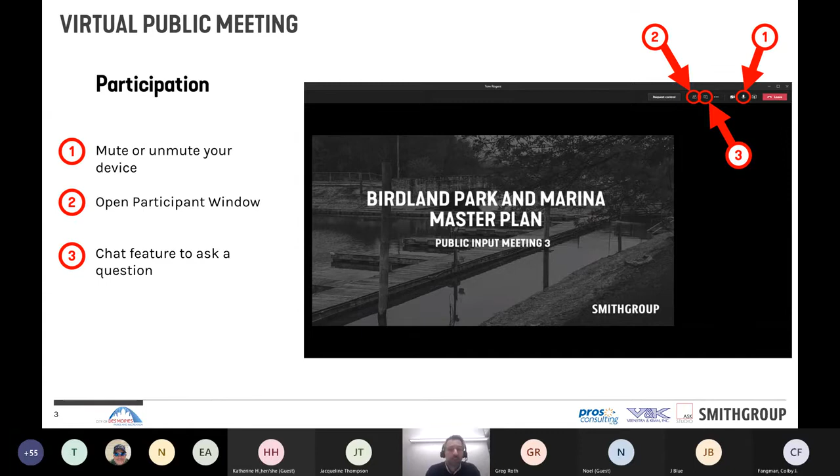As we said, we'll go over the schedule of where we're at, a summary of the work we've done, the concept refinement we've gone through, and then we'll talk about the big ideas we have. There's a few of us on the call this evening.

First, there are three of us presenting: myself, a principal and landscape architect with Smith Group; Jay Blue, a landscape architect and our project manager with Smith Group; and Brent Schipper, an architect with Ask Studio. We're also joined by a few collaborators: Connor Nett, a landscape architect with Smith Group; Greg Roth, a civil engineer with Veenstra and Kimm; and Leon Younger, a consultant with Pros Consulting, who are doing the economics analysis for the project. They'll be on the line to answer additional questions during the Q&A session.

As I mentioned—yes, Tom? Just so you're aware, I'm going to have to allow people to unmute their microphones, so I'll keep everyone muted until that time.

Thank you. As I mentioned, we started this a little while ago, beginning in August with a kickoff meeting. We went through site data collection, visiting the site, gathering background information, holding a public meeting, meeting people, and walking the site. We also ran a few online surveys before starting to develop concepts.

Once we had a basis for what people wanted, we developed an initial concept, or initial three concepts. We refined that and gathered feedback along the way, both from residents and from what we heard in our surveys, from city and park staff, and from our advisory committee as well.

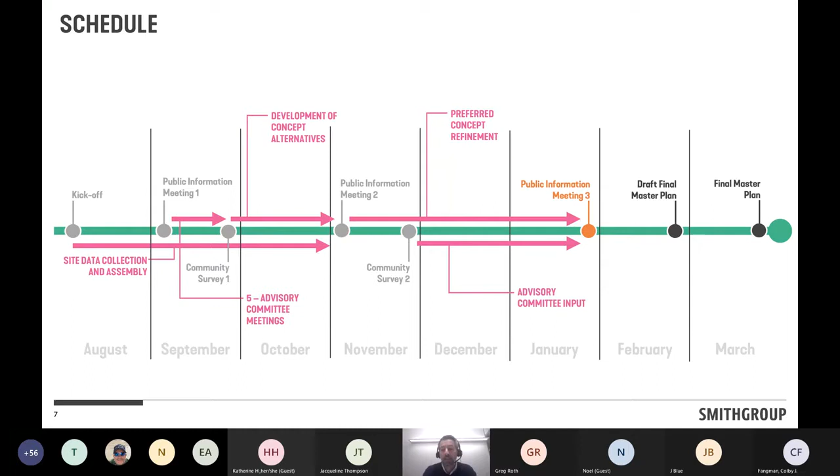So we want to start with what we saw and what we heard. The biggest, most important thing that came through immediately was the importance of the city's connection with this open space and the river, and how this park is really a little divided from the surrounding neighborhood and the rest of the city. This is due to a few factors: the levee as a physical separation, the busy road, the challenging connection across Saylor and Penn, and the connection over to Union Park—plus the fact that the lagoon actually separates your view from the river.

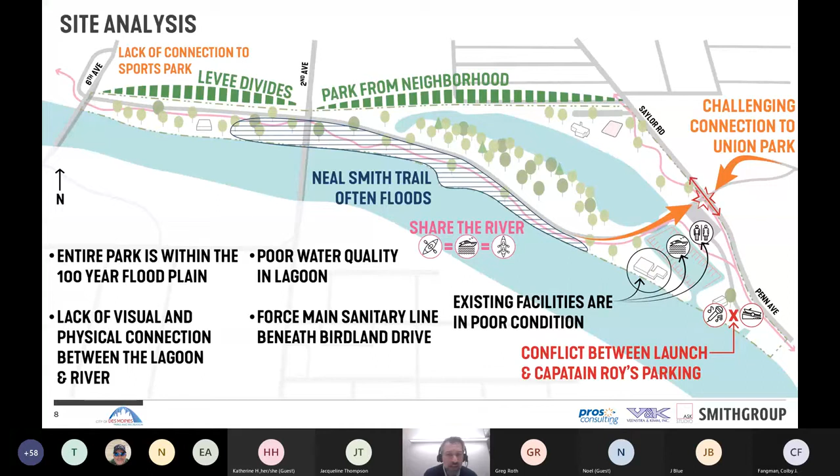But we also understood how important the river is to the community. This park lies within the 100-year floodplain. The water quality within the lagoon isn't as good as we'd like it to be. There are some existing utilities we have to deal with, some conflicts with circulation, and some facilities that are frankly ready to be updated.

To have an understanding of what was really needed, we conducted a couple different rounds of surveys and information. This is a brief summary of the feedback we heard from people. The first thing I'd like to point out is 52% of respondents actually lived within 3 miles of the site.

The majority were arriving by vehicle, but 20% were biking, 10% were walking. Of the people using the park, the first and foremost activity we heard was trails.

Second was paddlecraft, and third was enjoying nature. But we actually heard that there was an equal amount of use of the water in many different ways. We also heard that the people responding to the survey were visiting very often.

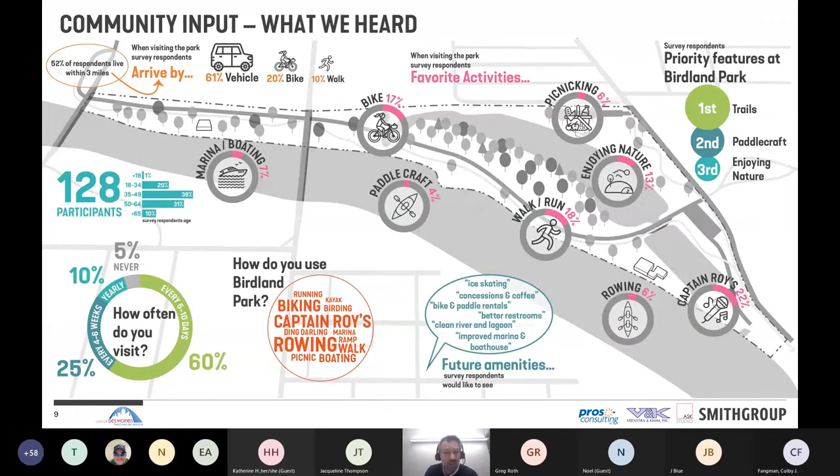60% were visiting about once a week, every 5 to 10 days or so. So we felt like we got really good input on what was happening and what was needed for the neighbors and people using the park on a regular basis. We also heard a little bit about what people wanted to see for future amenities in the park, from ice skating to concessions to bike and paddle rentals, to how we clean the river and the lagoon.

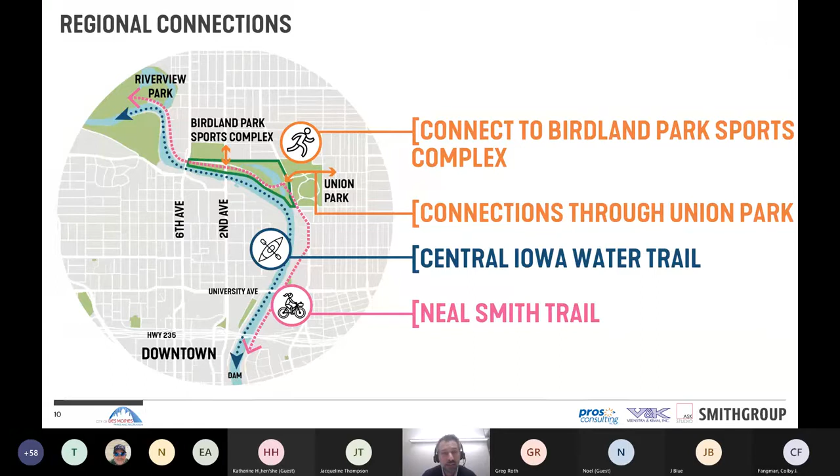We did zoom out a little bit, considering some of the regional connections, both the land connections, the Neal Smith Trail, the connections into the adjacent park system from Birdland Park Sports Complex to Union Park into the Birdland neighborhood as well. And then the connection to the Des Moines River and the Central Iowa Water Trail, recognizing that there are key points and key destinations, those pathways in and out of the park that are essential to our larger connection to the broader community.

We summarized what we heard from neighbors and residents in about 5 key points. We call these design drivers, and they really drove the decisions we made in our concept development for the park. The first is trails and connections - they're key to how we use the space and how people want to use Birdland Park.

Second is all forms of boating, from power boating to quiet boating, canoe and kayak, and rowing. All of these are really pretty equally desired at the park, and it's important to balance those uses. Third, socializing and community activity spaces are what really make the park special. We can't forget those spaces - they need to be integrated within this broader collective.

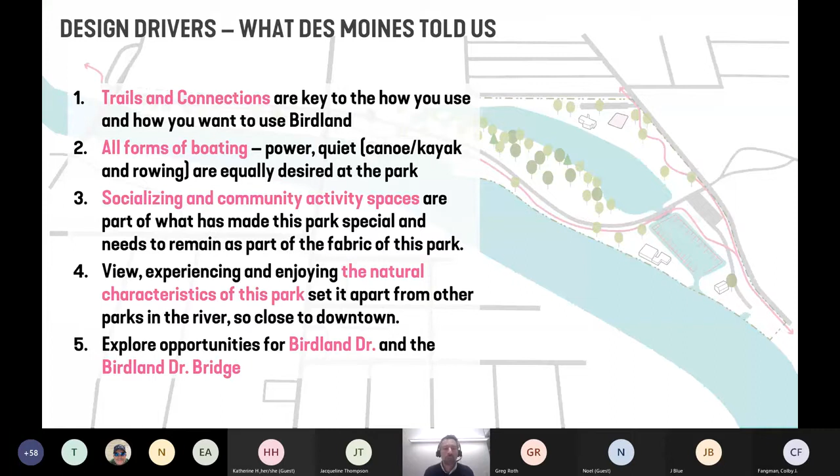But the real essence of the park itself is the view - it's experiencing and enjoying the nature in the city. It's the natural characteristics of this park that set it apart from the other parks on the river, and especially being so close to downtown. And last, we heard that Birdland Drive is important, and we need to explore what our opportunities are for Birdland Drive, how it's used, and how it's connected within the community.

So we developed 3 concepts. Now, these are not where we ended up - these are the concepts that we went through. I will go through them very quickly just to share the big ideas with you. The first concept we called Urban Escape. I'm going to point out about 3 big things with each of these - these are the things that we were exploring.

The first was how we handled Birdland Drive, the second was how we handled the marina, and the third was how we looked at the lagoon and the features around it. In concept A, we explored shifting Birdland Drive north of the park at the base of the levee, still connecting it in the same spot but removing it from the island. We reconfigured the marina within its existing basin, adding more slips, and created a connection into the lagoon for paddlecraft, along with rebuilding the Guzman shelter and creating a more robust package of amenities near the Ding Darling shelter.

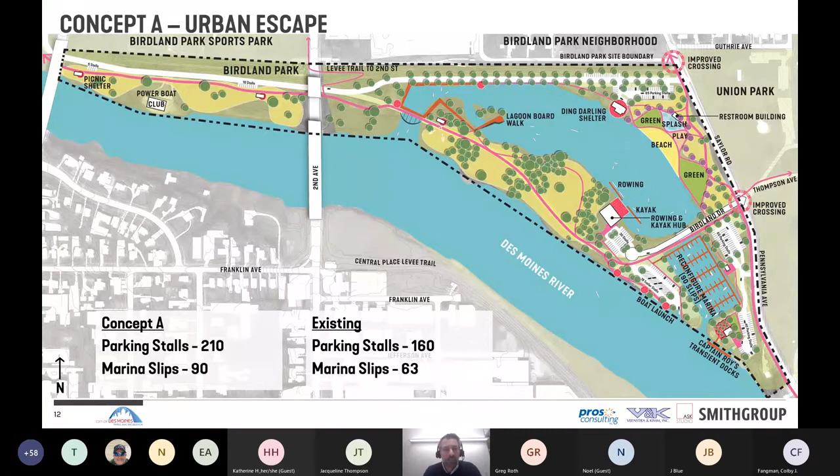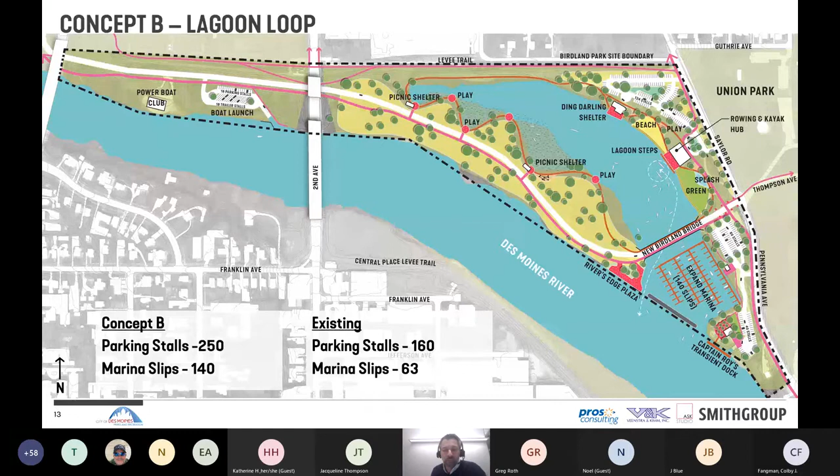The third concept we looked at was more drastic. We looked at severing the connection of Birdland Park entirely, and then moving the marina inside the lagoon, using the existing marina basin for paddlecraft and launching out into the river, trying to separate those two uses. This led to a much more intense use near Ding Darling shelter.

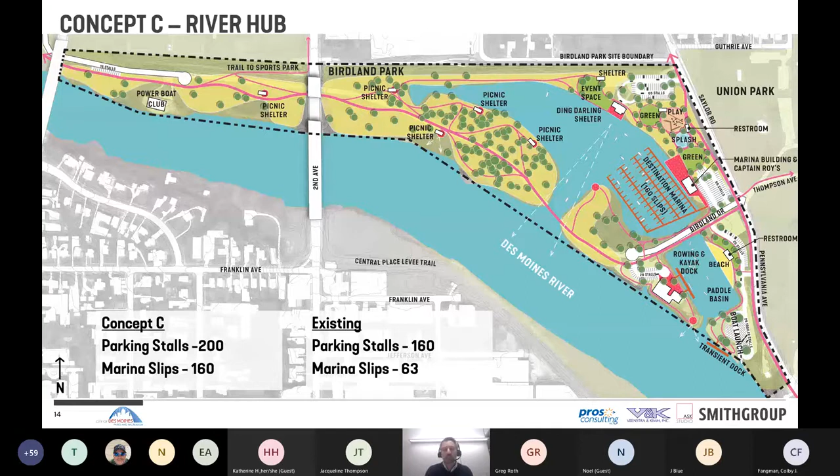So we presented those three concepts. We gathered public feedback, talked with city staff, with park staff, and met with our advisory committee. Over a period of meetings, we heard many different comments. We had some really great discussions, but we started to understand some core values and things that we needed to refine within the park.

But we really came around to one of the concepts, which was Concept A. In Concept A, we moved Birdland Drive, but we refined that in a few ways. Tonight we'll go through that bigger concept and then some of the key big ideas to that.

What I want to show you is how we refined Concept A first. The first thing we did, you can see to the west of 2nd Avenue, we moved the boat launch. So this would be located between the Powerboat Club and the 2nd Avenue Bridge, moving it away from the marina and separating that use so there's not quite so much traffic there. Second, we started with an idea of a boathouse and how we fit that in, how we fit Captain Roy's in.

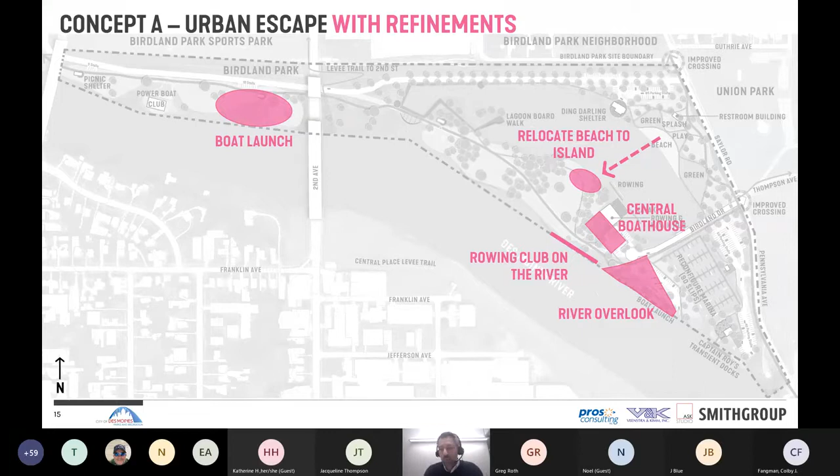We had this idea of combining these amenities all together in a central boathouse. Adjacent to that boathouse is this idea of a river overlook, an accessible area that people can come to as a destination out by the river. The third is we developed a beach concept. That beach would more be an upland beach rather than an entering-the-water beach, moving that to this island. So there's this destination site out on the island away from Ding Darling Shelter that creates its own separate destination.

So we developed that into the preferred concept that you can see here. From the west of 2nd Avenue, you can see the boat launch. Birdland Drive still goes under 2nd Avenue, and we relocated Birdland Drive so it's just south of the levee. You can see it on the north side of the park.

We used the island as a habitat restoration with walks and trails, seating to look out to the river, but potential access points on the lagoon side as well that allow overlooks, hiking, and fishing. And then dredging and reshaping the interior of the lagoon to improve the habitat that's there and improve access overall.

The other big idea with this was the idea of a destination play space with three main components: a play area, a play structure, a splash play area, and a skate ribbon and smaller playground, which we'll go to in more detail.

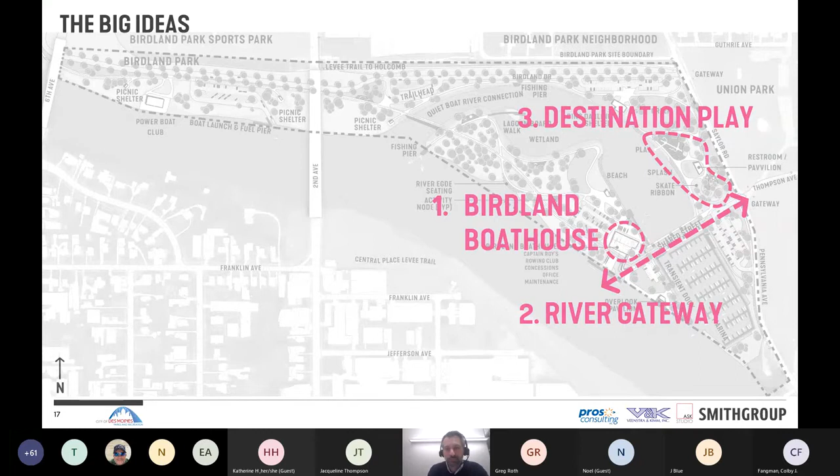The first of these big ideas that we want to talk about tonight is the boathouse itself, and Brent Schipper from Ask Studio will talk through that first idea. The three big ideas are the boathouse, this river gateway across the river, and the destination play. Brent will talk a little bit about the boathouse.

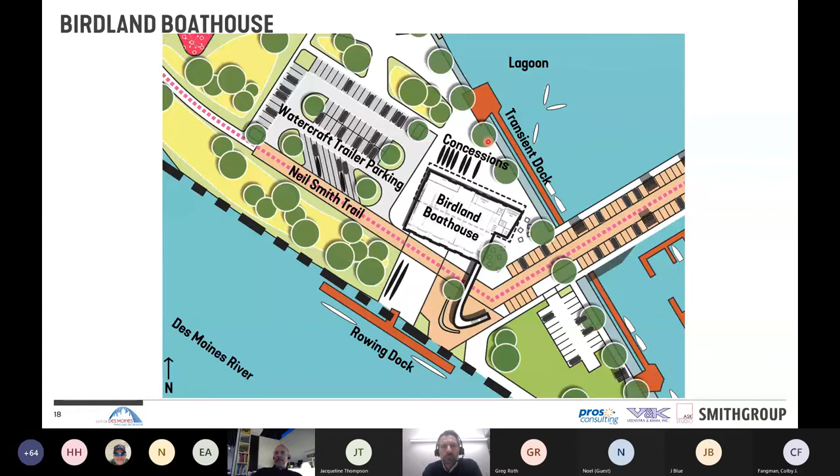What we were trying to do is we have a lot of activities happening here, but we separated those activities. It gives us a place with a lot of energy and a lot of people, hopefully, but those people are separated into different uses. So Tom, if we want to go to the images.

When we mention having a tower, that is the terminus for this drive and this special place. We haven't designed the tower, but we have imagined it. Some of these photos are just different ways of imagining a tower.

What we saw is that this is sort of the pinnacle of the park. This is where everything that happens at the park can be viewed from this tower, whether it's the rowing club, the view to the city, or just someone's way of getting up and into the building.

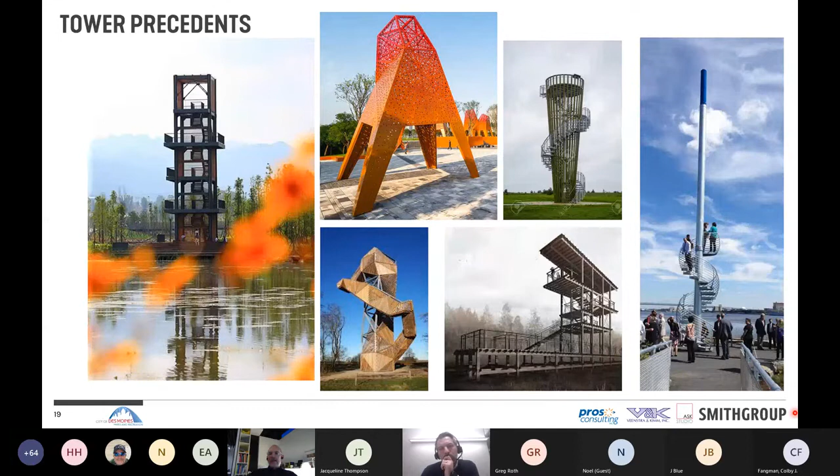And then the building itself, right now we're drawing plans.

And Tom, if we can go to the building images. We're going to show you a plan just so that you can see that yes, all this stuff does fit.

We haven't worked on the images of the building itself, but what we did was take some examples of what it would be like. The Austin Rowing Club is a great example of what we could be like, and actually all these are good examples.

What we're showing is facilities that have the storage for the rowing club at the base, and you can see the UW Conibear Shellhouse is the same organization, with storage at the base because we are at a floodable area, and the offices and Captain Roy's up in what we've referred to as our glass box.

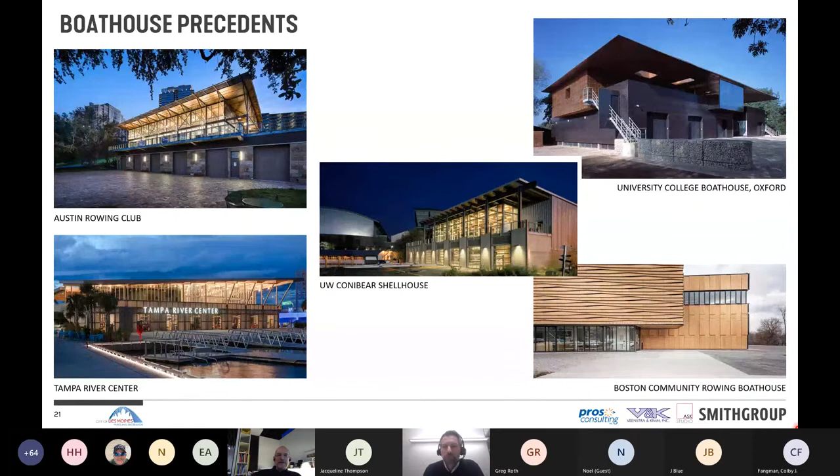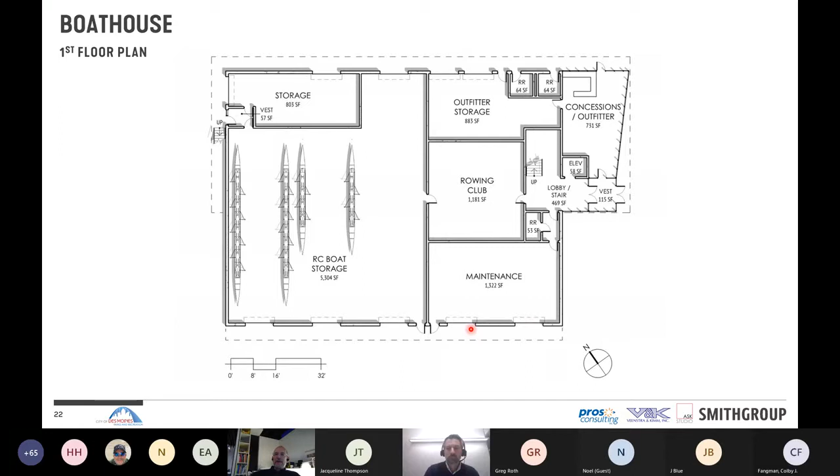Now, if you were to be going upstairs, you would come in the vestibule, come up the elevator or the stairs, and you would be in a lobby area that has either offices around one corner. We have restrooms for all the facilities upstairs, restroom facilities that would cover the offices and the meeting rooms.

And then we have Captain Roy's that would be the major part of that upstairs, and their dining area and their kitchen area. And so far, this is put together.

This was very much a preliminary design, but what this allows for is for there to be a kitchen area that has direct access that goes downstairs for services that are downstairs. And I think the highlight of the building is the river terrace outside of all of these spaces.

And that river terrace then connects with the bridge to the tower, so that the elevator, if someone wanted to experience the tower, they could experience from the elevator and come across the terrace and go over to the tower. So what we were trying to do is interconnect all of these different uses into one building that had a lot of synergy with all of its uses.

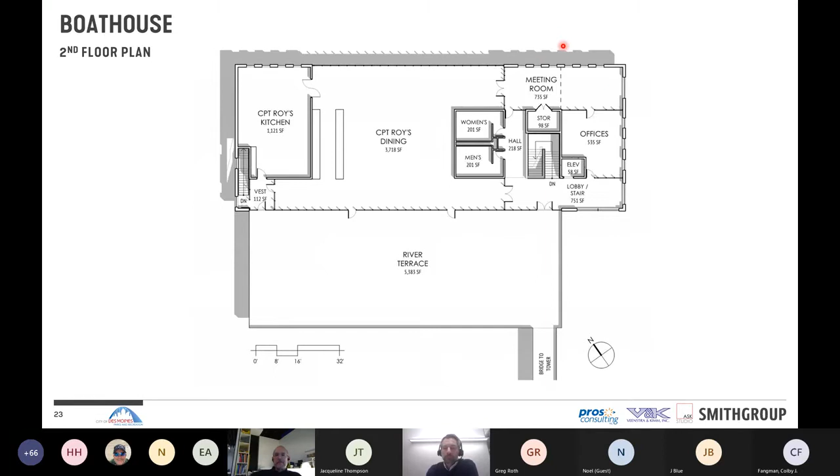All right, the next big idea that Tom had introduced us all to is what we're calling the River Gateway. This idea of connecting Pennsylvania Saylor Road all the way over to the river in a really meaningful way. And so what you can see here in this kind of peach tone is this area that we're defining as, and we're calling it the River Gateway.

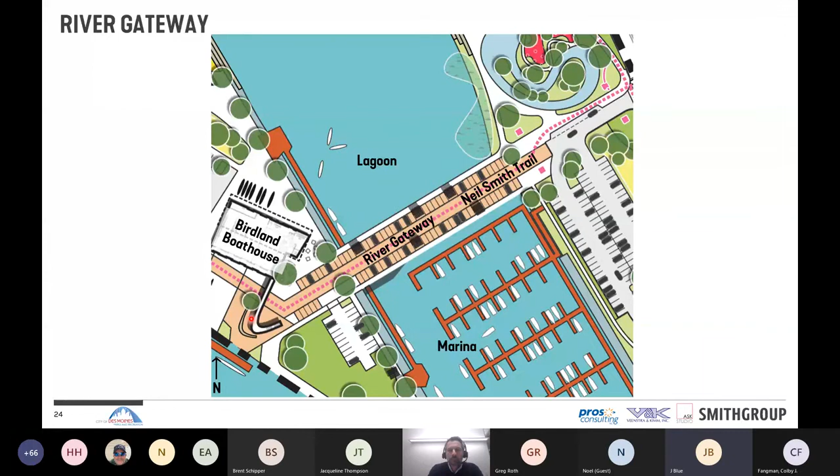Maybe that's not the right name, but that's the term we've been using for now. The idea being that the River Gateway begins at the entrance to Birdland Park, and then that tower structure that Brent just shared that would be connected to the new boathouse is a terminus to that River Gateway, and it serves as a mechanism to anchor that River Gateway. Tom, would you mind advancing us to some precedent examples of what that gateway experience could be like?

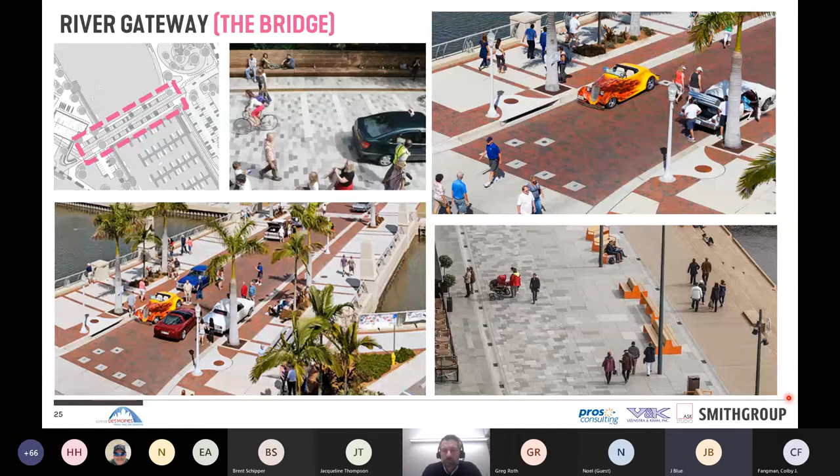On special events, that causeway or river gateway can become something really special.

If we jump to the next slide, Tom. I think you're slightly delayed from my screen. It's there on mine, so it is a little delayed on my screen. There we go. We can do some really fun things out there.

So a couple different things you're seeing here in the lower left-hand corner: what happens if we close the two ends of the causeway for 4th of July and it becomes another beach. We bring sand in and it just becomes this great pedestrian beach space, with no vehicles allowed for a while.

Or as we're seeing in the top center, it's a farmer's market, shown in the top center and top right. It becomes a farmer's market on Saturdays or Friday evenings, with food trucks out there or something like that. Different kinds of experiences out there that could be really special.

What you're seeing in the lower right-hand corner, we thought was really, really fun: a floating movie screen. That's a river gateway experience where folks gather for movies on the river, and this could be a really fun thing that happens in the lagoon. Special summertime movies on the river gateway could become a really special experience that happens over and over again, something the community could be involved in.

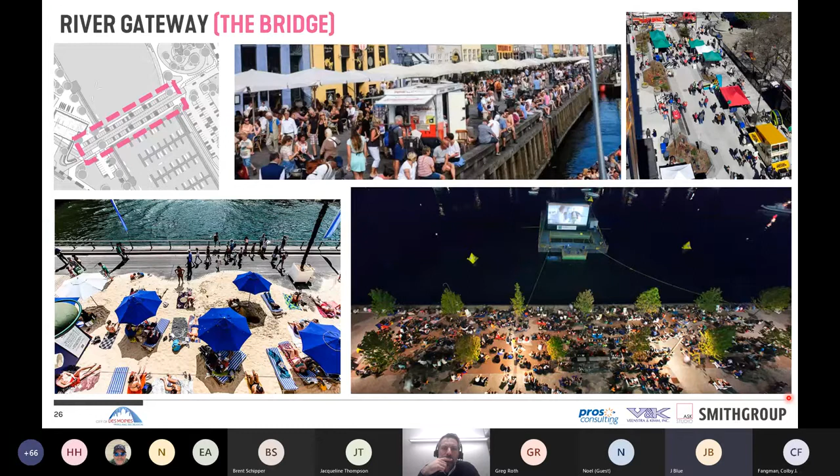It's coming, thank you. The third big area that Tom talked about was this destination play, and we have some really fun ideas about what could happen here.

We've really broken the play up into a couple different types of play experiences. There's a big play structure at the top of the play area with the idea that it has some sort of interface with the lagoon. You can see it shown with a tower and bridge experience. For folks trying to gauge that, those are the towers from Maggie Daley in Chicago, lifted right off of that park, so they are true size to a real space.

In the center space, we're looking at a splash experience and a shared restroom pavilion structure. It might be open in the summertime for picnicking, but in the wintertime that pavilion structure might have garage doors or something like that, allowing it to be a four-season structure, becoming the warming house for the skate ribbon shown down here.

The skate ribbon, to give a sense of scale, is about twice the size of the skate ribbon in Titletown in Green Bay, and about half the size of the one at Maggie Daley. It has a little bulb at the north end on purpose, creating a small rink area for smaller kids who just want to do some spinning around. There's a real intent that this skate ribbon has opportunities all year round, which we'll show in a couple slides.

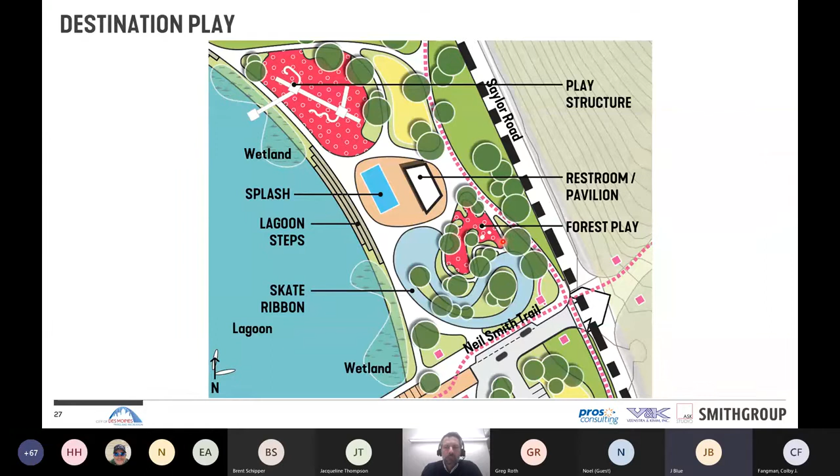And then there's something we call the forest play area, or the play pod—a smaller spot with different kinds of play experiences and a different kind of verticality, like hillside slides. It's a real opportunity for a bunch of different kinds of play opportunities to take place here. I want to show you a couple images of what this could be like.

And I know they'll be here momentarily.

So there's some destination play tower examples. The lower left-hand corner, as I said before, we lifted right off the Maggie Daley towers, from in Chicago. But a couple different other examples of some really fun tower structures that can have a lot of fun experiences.

We really like this idea of there being a couple different elevations of bridging experiences. Those bridges are completely enclosed, so kids can't fall out. You can see that in the upper left-hand corner too. It's a little tough to see, but those blue ribbons are actually taking you from one main tower to smaller tower pods, and then the last tower pod has a really fast slide coming out of it.

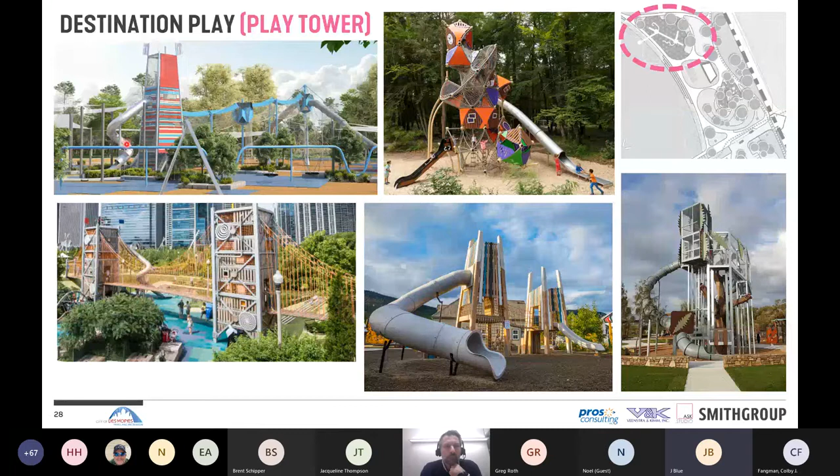And those are all playgrounds that can have some kind of a community character that we develop over time with you, and really becomes a custom thing for the city of Des Moines and for Birdland Park. There's a memorable piece to that. It's a one-of-a-kind structure, but it's based on the idea that it's based on a system that's made from a manufacturer.

A catalog system. Yeah, it's not a custom piece that we're looking at here. Exactly. It might be a custom arrangement of catalog pieces, but we're not looking at someone developing a custom piece for you. And there's some cost benefit in doing that.

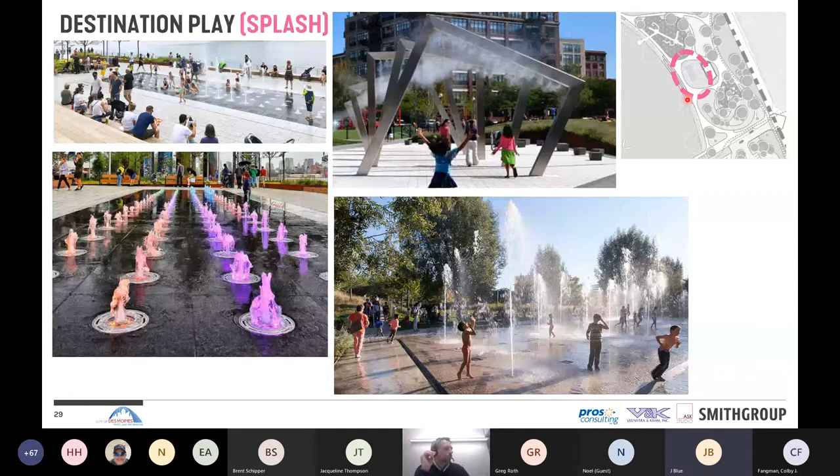The splash play area has some STEM features with it, STEM learning experiences, where we worked with a manufacturer that helped us develop a timing to the play features that allows kids to have an interactive experience with the timing of the fountains and the jets, and looking at different ways that they can come out of vertical walls in addition to coming up out of the ground. I think that's all an opportunity for this splash play area. Again, we don't have firm ideas of what this will be like. We're just trying to generate the sense of space, the place that it would be.

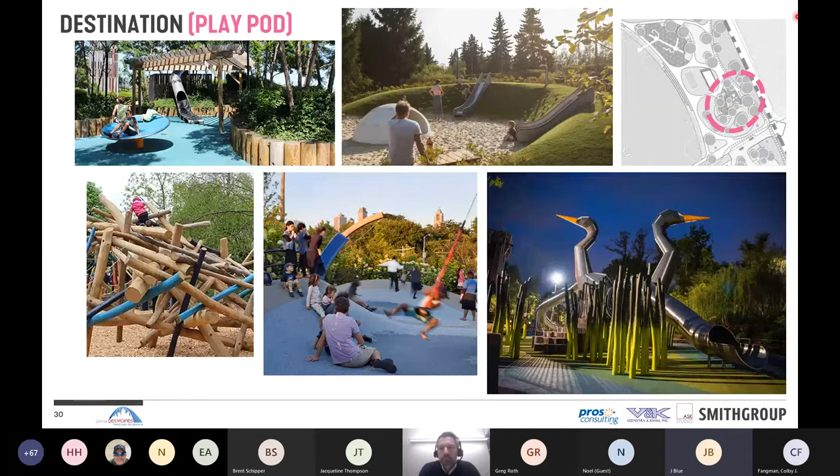Maybe you allow little scooters on there. Maybe it's allowable for people of a certain size or certain age to be out there on their tricycle or with training wheels or something like that. Maybe you have little mini races out there for people of different sizes. But just this idea that this ribbon becomes something more than just a one-season type of experience, that it can really have exercise and fitness value even in the warmer times of the year, and could be a lot of fun just to be in that space.

And that becomes really exciting to us, especially as it weaves its way around the play pod, as it bumps up to and gets close to the lagoon, as it gets close to the splash play area. It becomes really exciting.

There's a couple different systems we talked about with this as well, whether it is a glycol system that keeps real ice cool, or there are systems that use fake ice that could function for this type of use. So there's some opportunities to explore how this fits in and how it's maintained and operated throughout the year.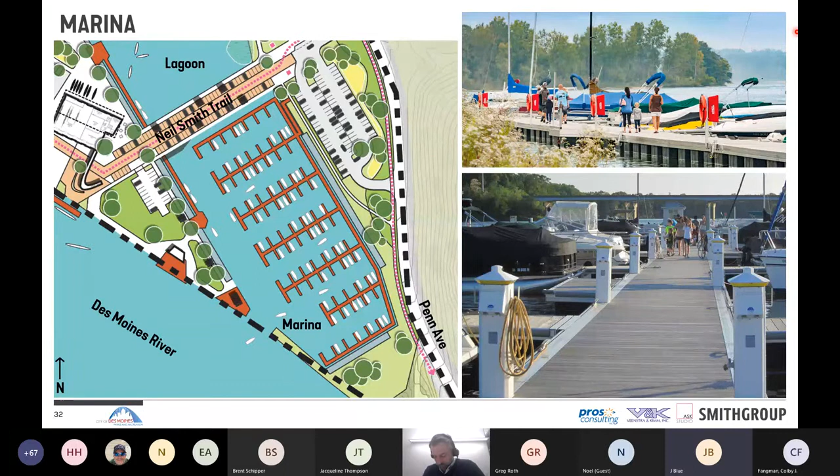We had a call earlier this week with the parks group from the city of Des Moines, and the question came up, what would that be like? As you can see, it could be composite decking or aluminum decking, but really the intent is to have a much cleaner, more modern form of marina.

We're also looking at the opportunity for a larger variety in boat sizes, from 20-foot to 35-foot boats. Colby, just to help you get a better picture of what that gateway might be like—we talked about this in the upper right-hand corner—a gateway does not have to be a chain link fence. A secure gate system to a marina does not have to be a chain link fence. It can be much more aesthetic, as we're seeing from a project at Cedar Creek.

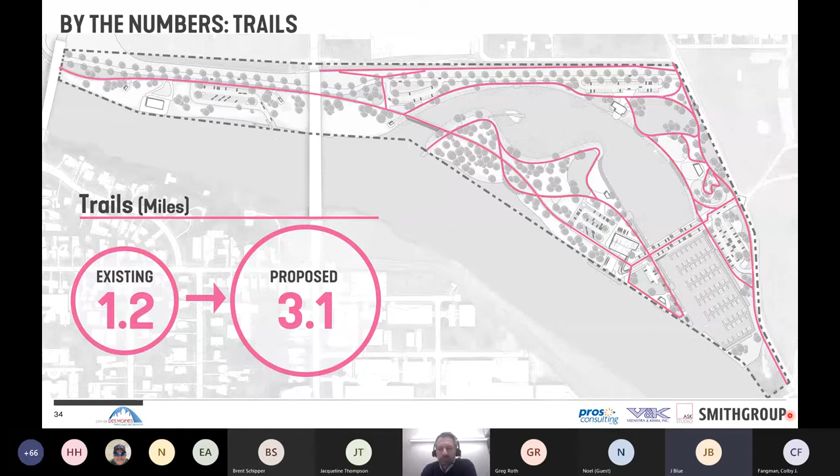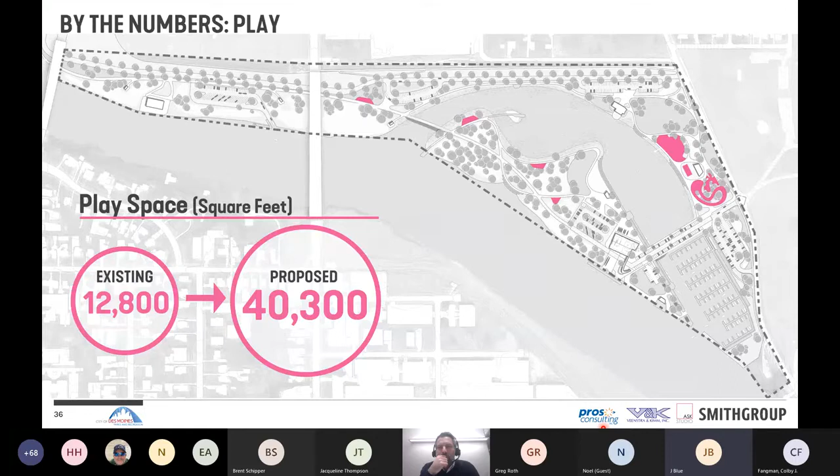And we also hope that destination play area becomes the kind of place that my kids want to go to over and over and over again. Anybody who's got kids at the right age knows exactly what I'm talking about. They have these playgrounds they want to keep going back to.

One thing I want to make very clear to everyone, because this was a question that had come up in some of the earlier concepts, and I'll allow Tom to trace this out with his mouse maybe for us. The intent is that large motorized boats are going to go to the marina or to the public boat launch. The lagoon is not intended to provide access for large motorized boats. That is a quiet boat area, and occasionally there may be smaller outboard boats in that space, but that lagoon area is intended for quiet boats. We want to make that very clear to everyone. That bridge that goes over the gap between the river and the lagoon is not designed for the larger boats from the marina or the public boat launch to be able to fit through there.

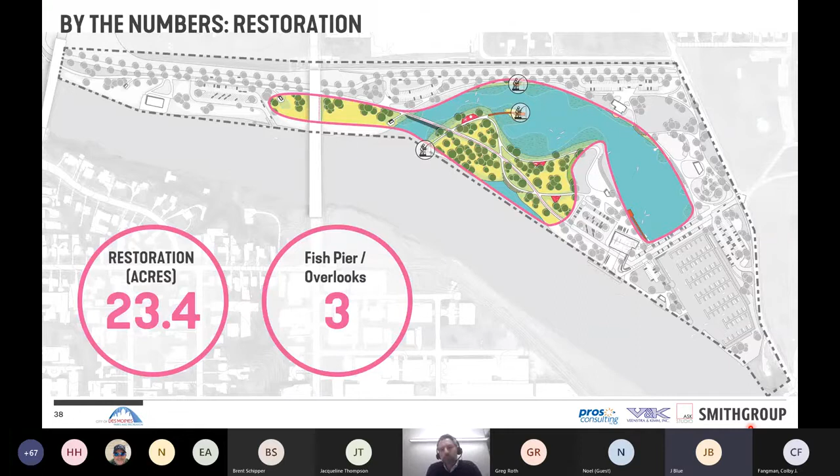Is that our last slide, Tom? That is our last slide. Our last slide ends with an image of the concept master plan. I do want to point out something we didn't cover when we presented the master plan. Tom, if you would take a minute to show the levee trail we've designed into this. I'm waiting for your cursor to pop up. Oh, there we go, up here.

We looked at developing a levee trail that would take you to 2nd Avenue. We've had preliminary discussions with the city about a connection to 2nd Avenue that would allow a visitor to run, then go north along 2nd Avenue up to Holcomb. If we had a special event out here, say the rowing club regatta happens here someday, we looked at using the parking at Birdland Sports Park, bringing pedestrians along Holcomb, crossing 2nd Avenue, over to the east side, down 2nd Avenue, picking up that levee trail.

That levee trail will also spill you right back out - you don't actually have to run the whole levee. We've looked at a way to come down the levee trail right on the west end of our park here as well. And we started to look at how that 2nd Avenue trail and levee trail could connect up with the Central Place levee trail on the south and west side of our park area.

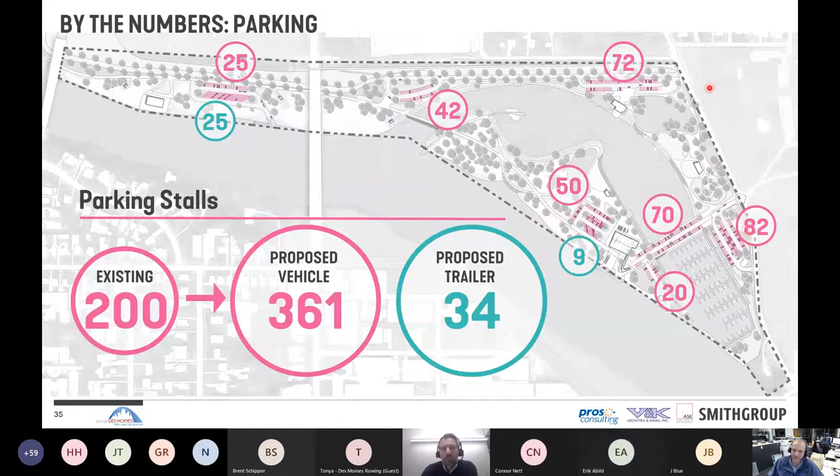Can you review again where car traffic will be able to go? Just tracing that street line. I think Eric is trying to say something too. I was having a hard time hearing Eric. Sorry, I didn't know I was unmuted. So I'll show.

Colby, are you following my pointer here? Yep, I'm following Birdland Drive, where it would be to the north of the park, and it would go under the Second Avenue Bridge where it goes today. Parking over here next to the Powerboat Club. If I drive back, parking at a trailhead, going back along Birdland Drive, parking by the Ding Darling Shelter. Then I could drive back out on Saylor, and pull in at Thompson to park next to the marina, and circle that parking lot.

I could go out on Pennsylvania, come back in and go down the River Gateway, and turn left into this small parking lot that serves this overlook pavilion. There's also parking on the River Gateway as well, and I could turn behind the boathouse and go to the smaller lot back here. But my vehicular route stops right here where that peach color stops, and then I would go back out.

Thanks, Tom. Next we have a comment from Councilor Westergaard: this is a wonderful, exciting master plan, and I am excited to move it forward. Really appreciate the comment, Councilor Westergaard. Thank you. I believe Eric was up next. Go ahead, Eric.

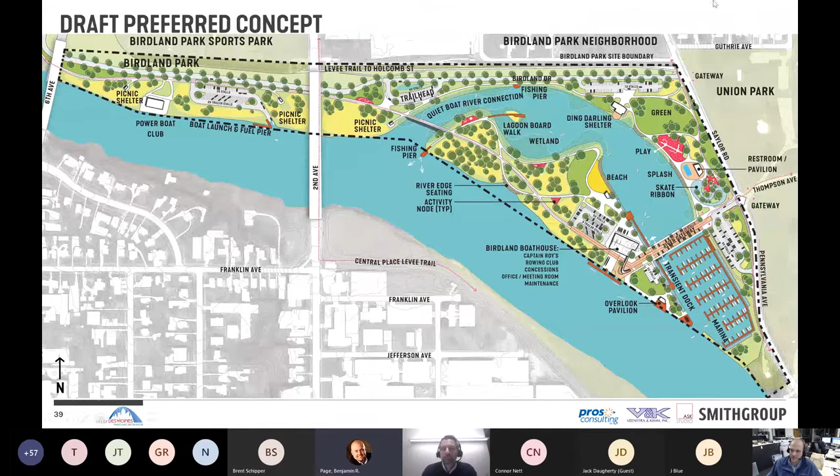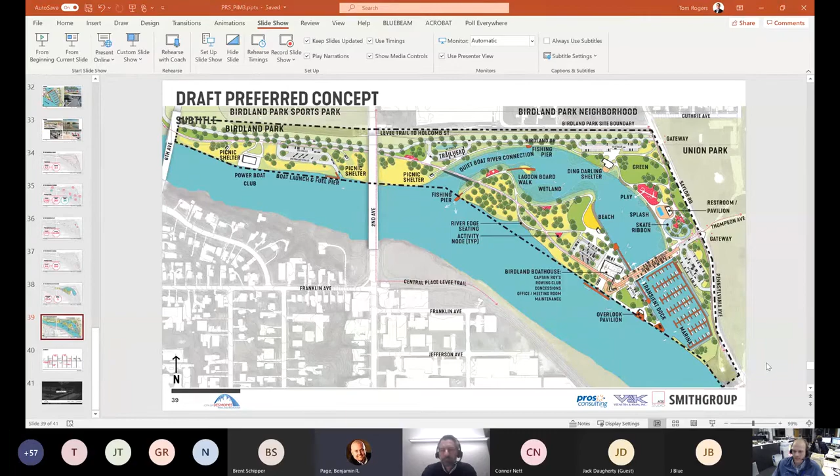We have to go through a public process that takes us through a park board approval. On the call tonight is a number of great park board members that I know support this project, including our chair, George Davis. And then eventually the entire city council has to weigh in.

I think the elephant in the room for a lot of people is it's always great to have these great plans on a shelf, but can you actually do them? I really believe we can. If you look at the history of Des Moines and all the great public spaces that have been built, most have been built without really a lot of city taxpayer money.

I looked at Grays Lake as a great example. People always said, if you look back, you lived in Des Moines long enough, you realize Grays Lake wasn't Grays Lake like we know it today. It wasn't anything people actually wanted to visit. They felt unsafe there most times until it was built out in the late 90s, early 2000s.

This has the real capabilities of becoming something bigger and better than Gray's Lake as far as activity and hubs. It could be one of the most iconic parks in the history of this city.

So we need your help to get through the next couple plans, but over time we need your patience too, to make sure you understand that a lot of this will be subject to fundraising and to grant writing and to finding philanthropic people to get this done in waves and phases.

Lastly, I would say that all the thanks are very appropriate to you, Jack and Wade at Captain Roy's, for putting this back on the map. Our consultants, we told them to dream big, and I've never been more impressed with the consultants that dreamt this big for us. Hats off to them.

They listened, and they did a great job, in my opinion, to bring everybody's ideas together to one cohesive plan.